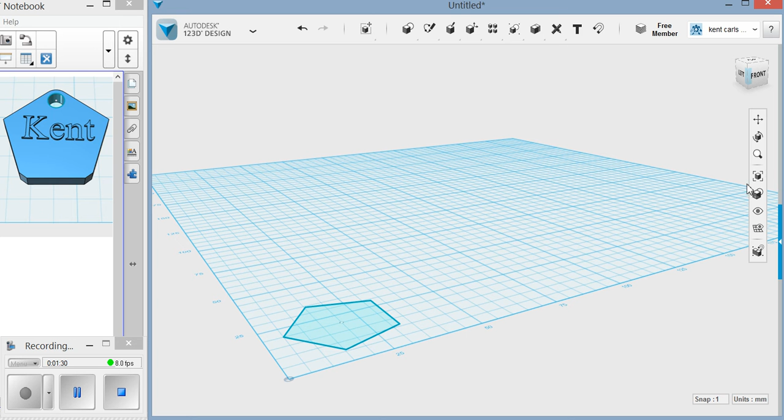Now something you're going to want to do, or I recommend, is go over to this sidebar and use this thing called Fit. That's basically going to make it bigger for you, and then you can rotate it by right-clicking to make it fit a little better. The other thing I'd recommend is rotating this shape so it will look correct. So I'd go up to here, move and rotate.

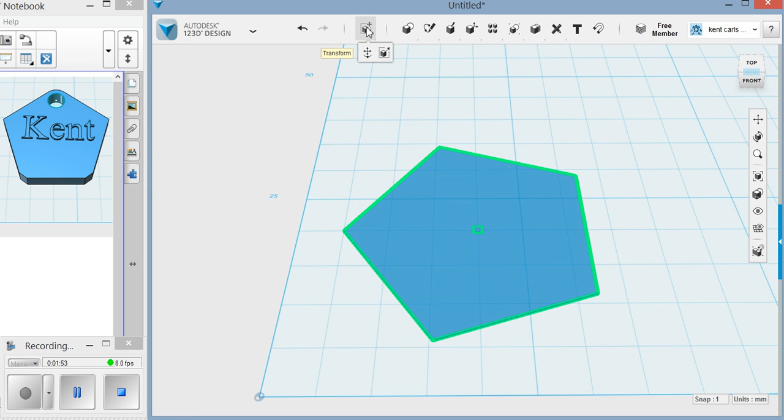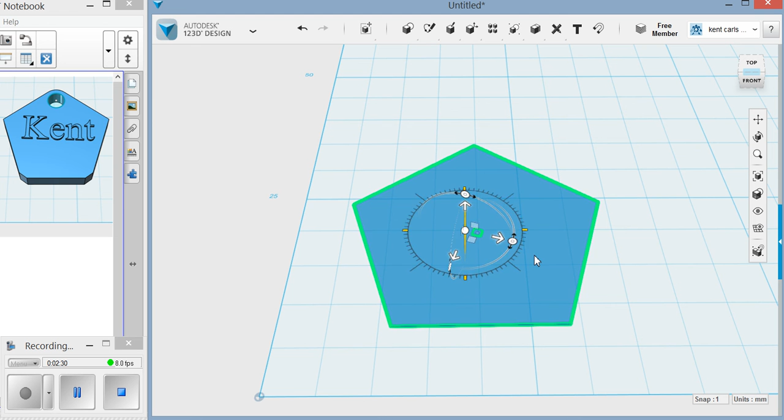Now when you're rotating it, you're not going to get exactly the right angle, so you look between values - okay, 20 doesn't get me there, 15 is not quite enough, so I'll maybe put 17 and a half. And it looks like I've chosen the wrong angle there - sorry, negative 17.5. There we go, and that's pretty close, so I'd hit enter. Now it's just a little bit easier, it looks a little better for me instead of being slightly rotated.

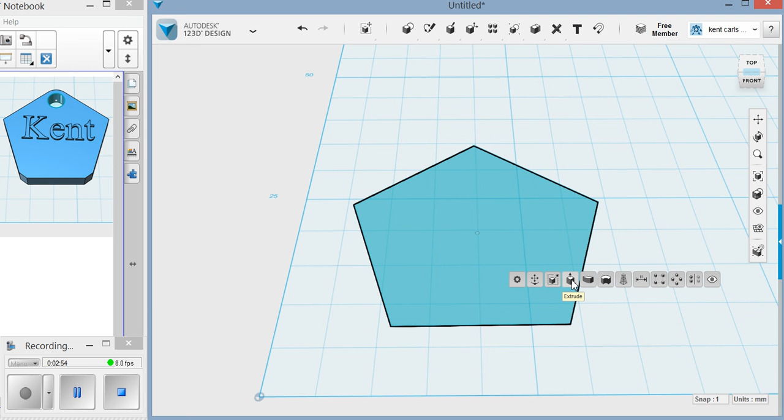So I've placed my shape on there. Now the only other thing we're going to do in this video is learn how to get it to be three-dimensional. So I'd click on there so that it's filled in and shaded. Then this little wheel comes up, and you go over to the one that says extrude, and that makes it go three-dimensional. I'm going to pick 3 millimeters, so I just type 3, hit enter, and now I've got a three-dimensional shape, as you can see right there.

In the next videos we'll look at how we make a hole in the top of it, and then eventually how we get text and how we make nice beveled edges or a rounded edge up there.